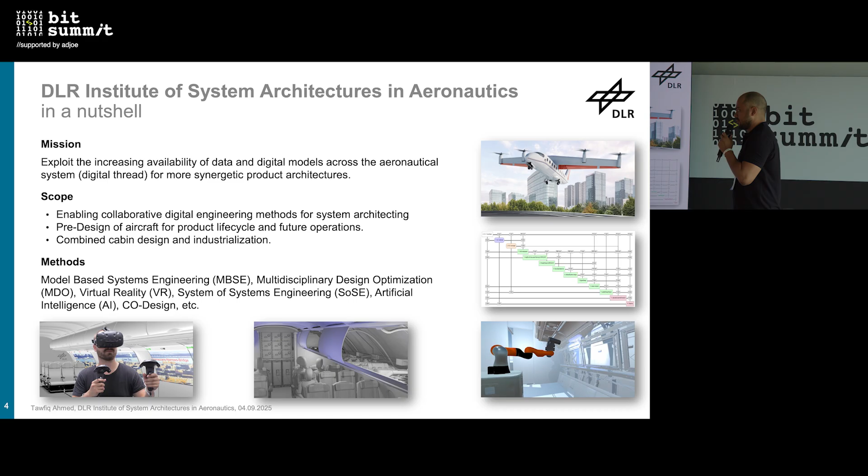And of course, with artificial intelligence, we try to implement it everywhere it makes sense, mostly machine learning. Sometimes it's surrogate models or probabilistic models for different parts of the data workflow. And also we do a lot of co-designs and robotics and so on.

So first of all, what are the different fields we are interested in our institute? First of all is aircraft concepts. So before we create or design an aircraft, we have to find out different versions of that aircraft and find out which one makes the most sense for the specific mission. So this is one of the most important topics we work on in our institute.

And the second one is zero climate impact. So whatever we are designing, it shouldn't have any climate impact, like in terms of carbon or emissions whatsoever, you know.

And the last one is system integration. For example, we are researching implementing hydrogen capsules inside the aircraft. It's like a future version of fuel, because at some point we'll run out of fossil fuel and have to find a replacement. One of the most promising technologies we have is hydrogen. So we work a lot on hydrogen tanks and hydrogen integration into aircraft, trying to understand how it works before going into prototyping. And also certification - okay, you're done, now what? Who gives you the permit? So this is what we do.

Secondly, we also perform digital manufacturing, not physical manufacturing, don't get me wrong. We design how it might look when going into manufacturing phases, and also integrate cabins - not only from outside, we also integrate the cabin inside the aircraft and see, does it make sense? Does it fit well with the design we are creating?

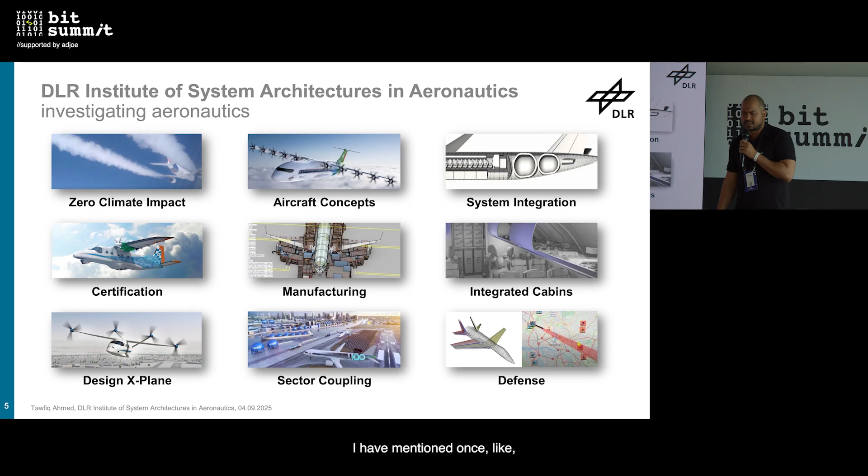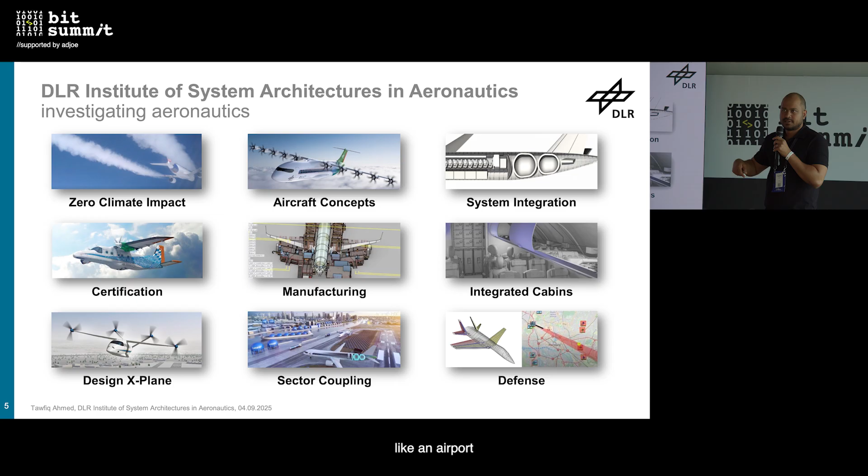Also sector coupling is another part. As I've mentioned, think about an airport where you have different systems and have to understand how to implement all those together. We have a specific group that works on system of systems. They simulate an airport, how it looks, running through the whole thing - airplanes coming down and going out. It looks easy, but when you think about thousands of flights a day in an airport, and you have to consider the energy, the maintenance, the fueling system, the passengers incoming and outgoing, it becomes quite complex.

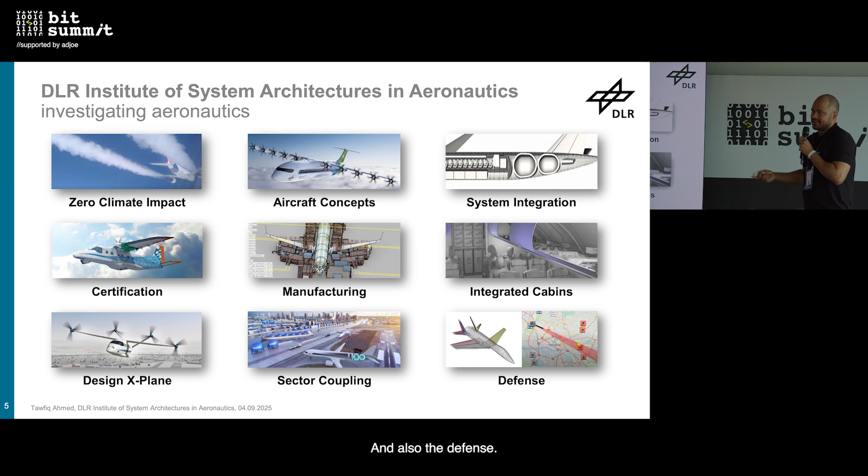And also defense - I can't talk a lot about the defense side, but you understand, right?

So my first question - do you have any idea how we design an aircraft, or how to design an aircraft? Anybody? Maybe the first phase. All right, I'll give you a task: you have to create or design an aircraft. What do you do first?

Very good, very good. Yes? I think that's very good. Yes? Like a base model and then continue. Yeah, actually all of those answers are correct. Even ChatGPT was correct.

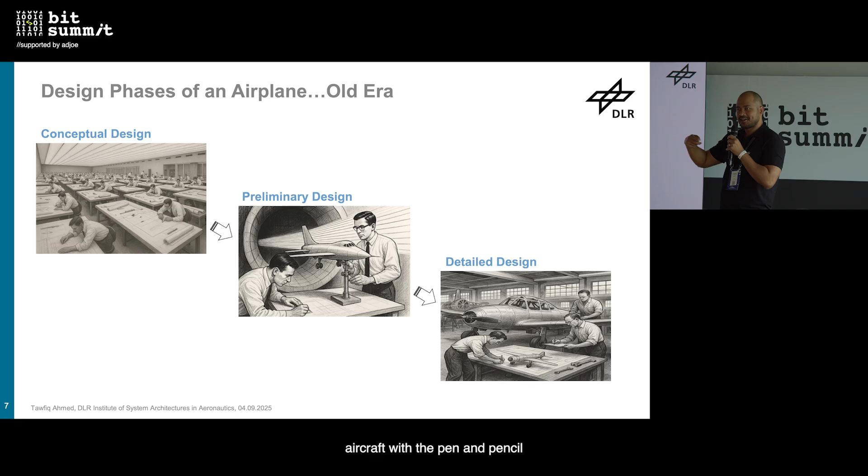But before we introduced the digital era, this is what it used to look like. First, we talk about the conceptual design. Can you imagine engineers designing the aircraft with pen and pencil on paper, hundreds of thousands of engineers together, before a digital CAD system was introduced? So this is the first part, conceptual design.

I'll go a little more detailed in the next slide. The second one, we design the preliminary version of the aircraft. The first thing you do is solve the basics of the aircraft - look at the requirements, then solve the physics of the airplane, then decide what it should look like. Then you create a small model and put it in a wind tunnel, and then you get the data.

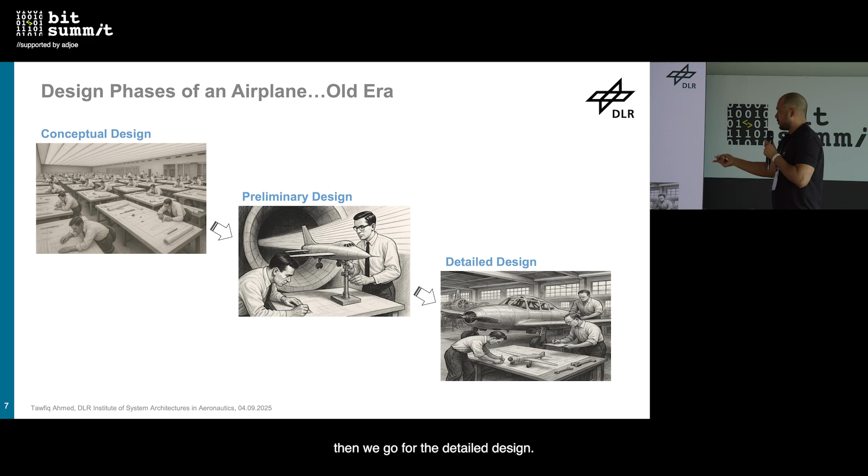If you're satisfied, then we go for the detailed design - we create the detailed design of the whole airplane, and then we create a prototype, and then we fly, and then we see how it looks. Kind of dangerous for a test pilot though. For engineers, we just say it didn't work - but for a test pilot...

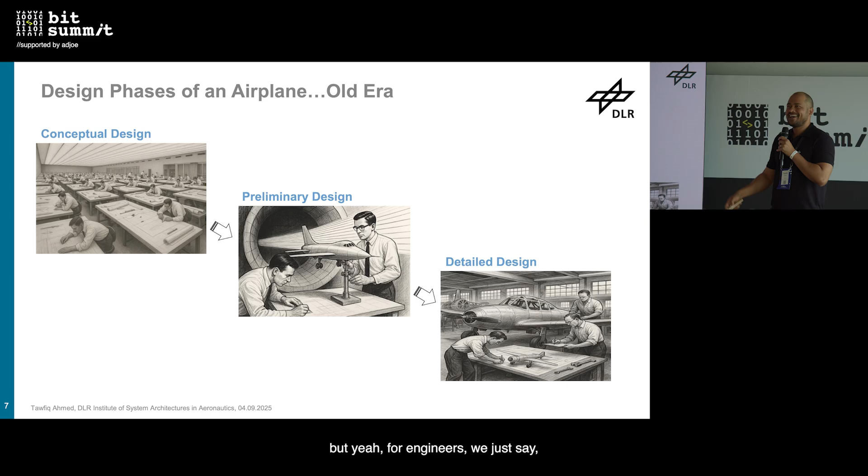So let's go a little bit more detailed. The first phase of conceptual design: first, you derive all the requirements, all the external drivers. Then you solve the flight physics - how it should fly, how far it should go, how long it should stay in the air, how many people will be in the aircraft. And also you do the new assessment of new technology.

This is a very important part, because designing an aircraft from start to end - the whole life cycle could take decades. Like the models you see - I think I've seen somebody from Airbus here, we just met, I think. All right.

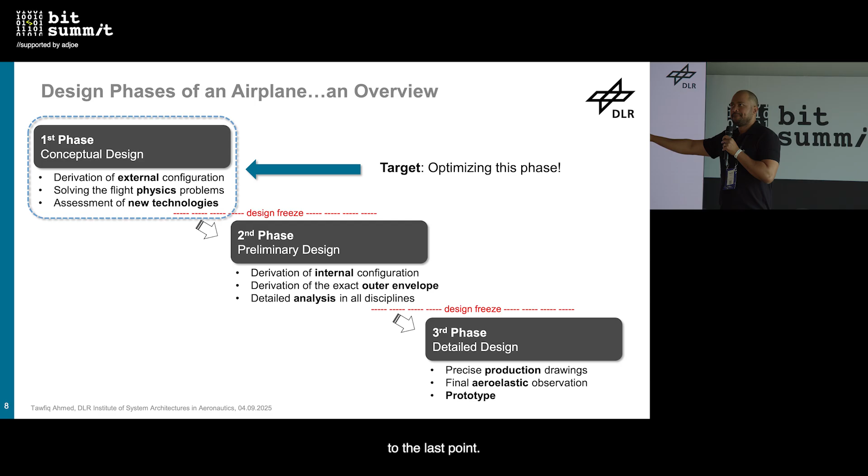It takes around a couple of decades from the starting point to the last point. So you have to also consider that within this 10, 20 years, the whole technology might change. That's another important part you have to think about, so we also assess that part in the conceptual design.

Second one is preliminary design. Now you decide, okay, I have all the calculations done, I've decided what it should look like. Now you design it, create a small model, put it in wind tunnel testing, and test it for different ranges, like different altitudes of the atmosphere. Then you get the data, you validate your calculation, so it works like a cycle.

When you're satisfied, you say, alright, let's do the detail phase. Now the test pilot comes and says, let me try it, and if we're all lucky, it will fly nicely. So this whole thing is kind of a loop, but when you're done with the loop, you come up with the design freeze. You just freeze that phase, you don't touch it anymore. Otherwise it would be a never-ending loop.

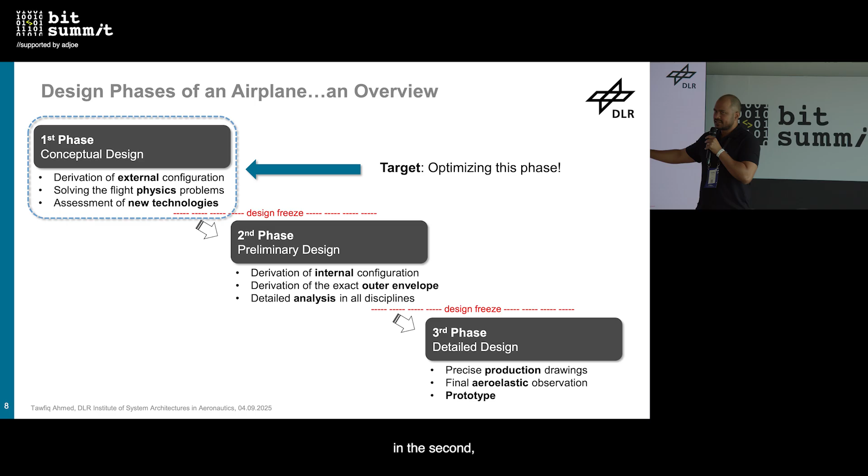So our main part is to optimize the conceptual design part so we can minimize as much error as we can before we go to the other phases. Think about finding errors here versus here. Why not optimize this part before this one? Actually, we optimize all these phases, but the preliminary design part is very expensive and time consuming, and the detail phase is life-threatening. So you have to focus a lot on conceptual design so you can come up with solutions to all possible problems.

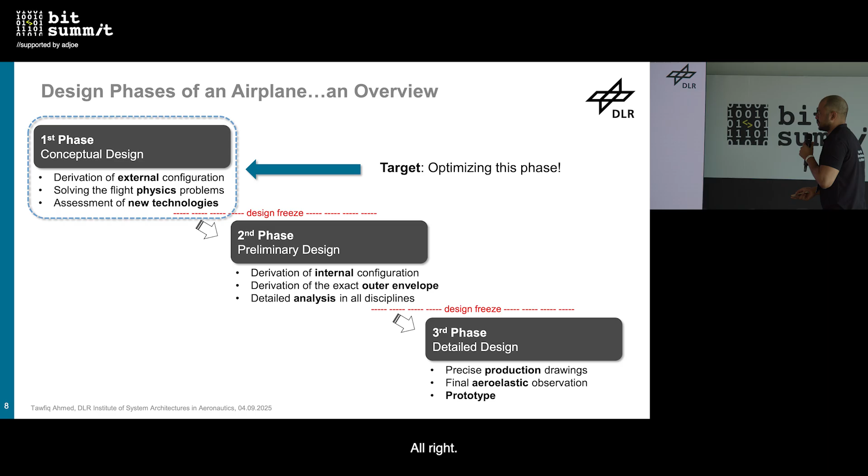Now the question is, as I've shown you pictures where all the engineers were drawing on papers, now is the new era. So what if airplanes could be designed digitally first, before we move on to those physical phases? So why digital? Any idea? Why should we go for digital design? Cheaper? Faster?

Reusable? Safer? Verifiable? Very good, I think they're all correct answers. It's faster - it used to take months, now we can do it within minutes or hours. Now we can run 100,000 or millions of simulations before we create a prototype, so it's very, very cheap right now, and we can find errors before we go to the next phase.

It's sustainable aviation - we have to find a way so this aircraft design is not producing a lot of carbon or whatsoever. We can experiment with a lot of things, optimize the design, change the design and see how it works, which isn't possible in the physical phases like preliminary design and detailed design. We can also connect all the systems - the cabin, the aircraft itself, the fueling system, the other control algorithms, or the engines.

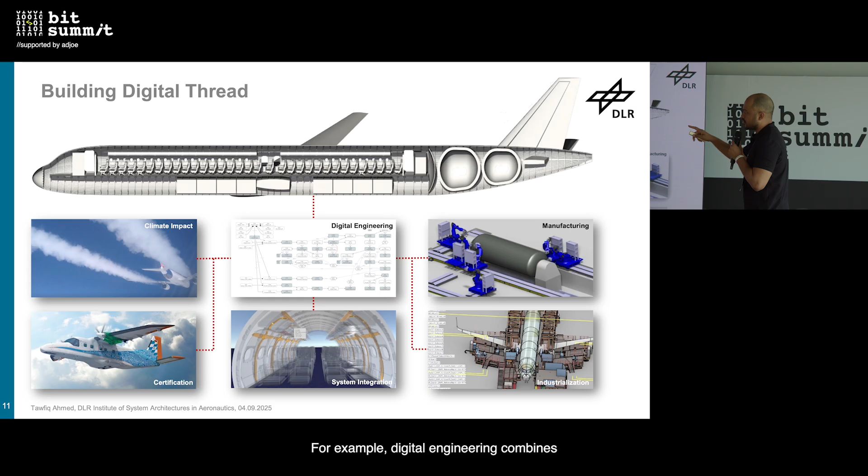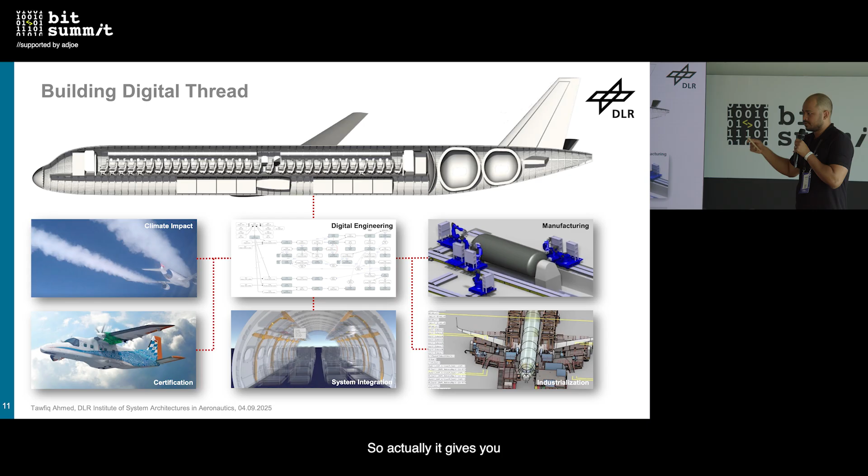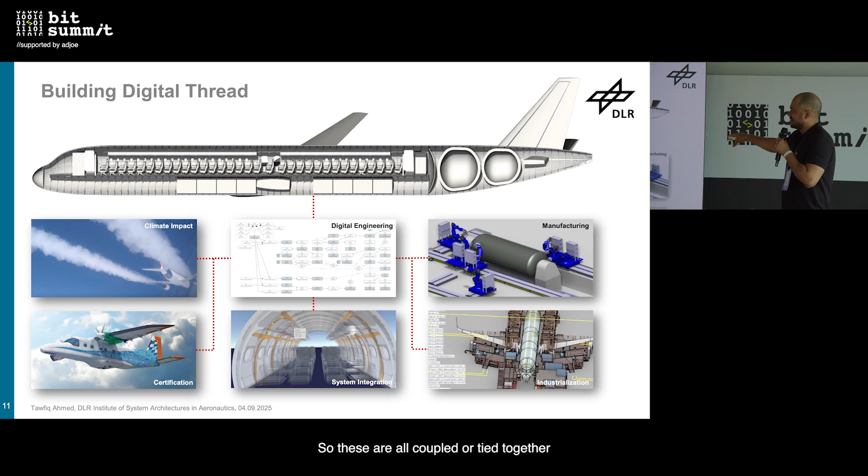First we do digital engineering. What it is, is it combines all the different phases. For example, digital engineering combines climate impact, the manufacturing phases, industrialization, system integration, certification, all together. As you can see in this slide, there are lots of different workflows, lots of different parts - those are different parts of the whole digital process, all coupled or tied together in a digital thread.

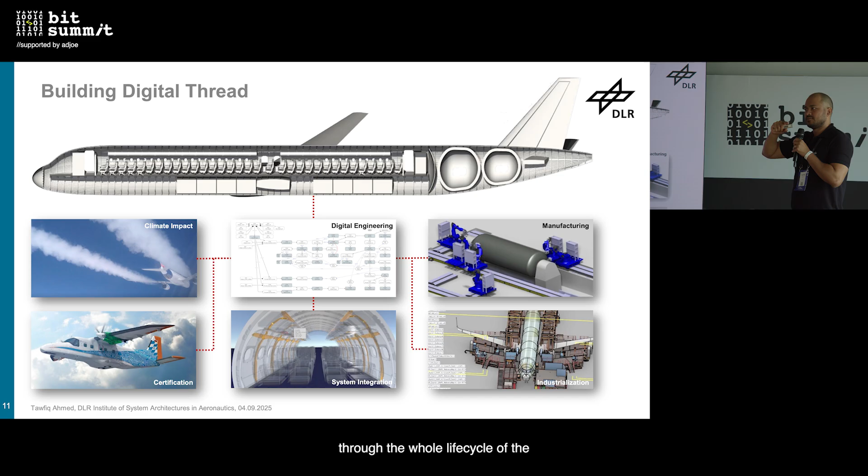So if you run it once, the idea is you get all the information about what might happen through the whole life cycle of the aircraft design. So in our digital engineering process, how do we approach this problem? First we define the problem - what is the problem? Let's say somebody comes, very rich, and says, I want you to create an aircraft that can fly, I don't know, 20,000 miles. That's the problem definition.

So you come with the stakeholders and the needs, the requirements. What do you need? Who are the customers there? And then secondly, you decide the system specification. So the first one was the mission requirement, this one is the system requirement. Basically, how my aircraft should look like.

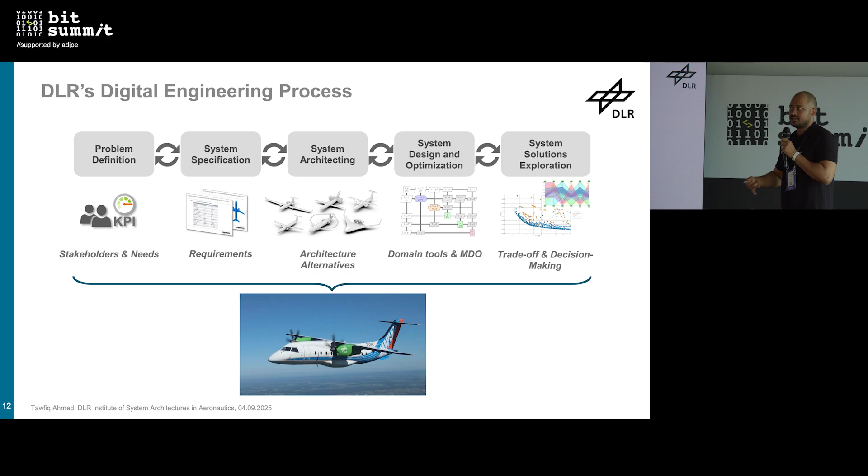Second phase of the problem. Third one, system architecting. So you have the requirement from the stakeholder, then from the aircraft. Now we have to design a couple of aircrafts and see what is the best one. The fourth one is system design and optimization. Now you have the designs, and you optimize the whole system to make the most possible design spaces for that problem.

And then the last one is system solution exploration. So what you do, you trade off different models, you choose one, and this whole process comes up with an aircraft. As you can see, all of these phases are interlooped within each other, giving feedback after each loop. It's a very optimized way of designing the whole process, because in each phase you can find the error and reduce it before you move to the next phase.

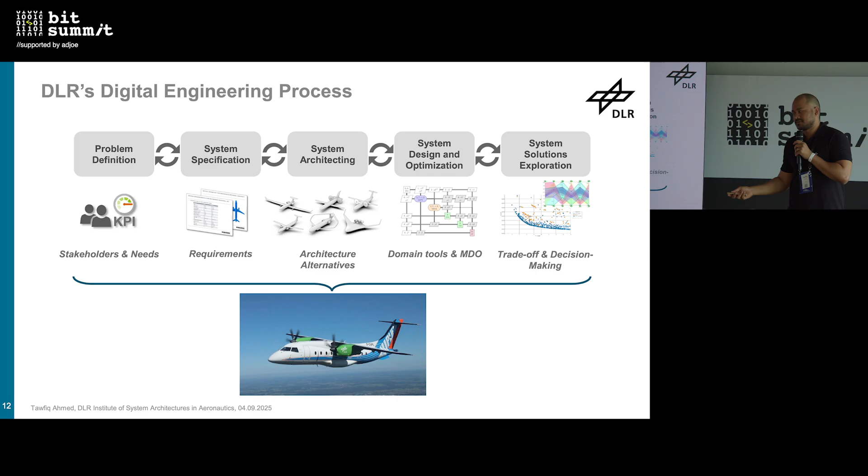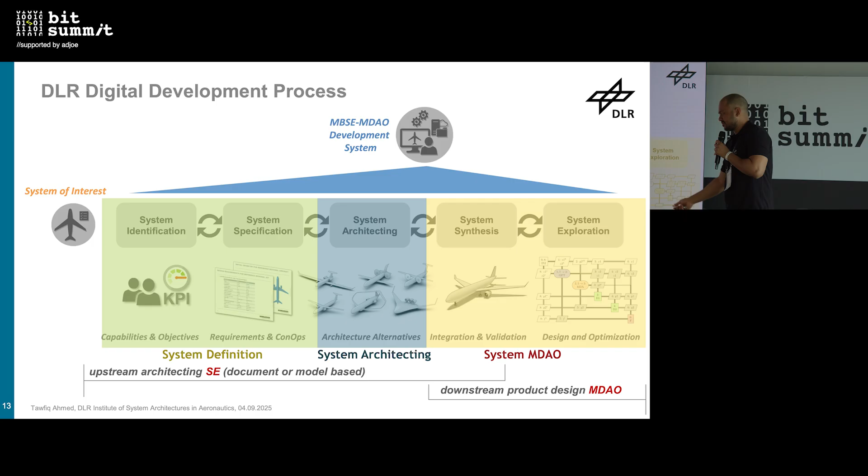So in general, we call these the three different phases of the design problem. This is the upstream architecting, and this part is the downstream product design. This whole process is called MBSE, MDAO development system - model-based system engineering and multidisciplinary design analysis and optimization.

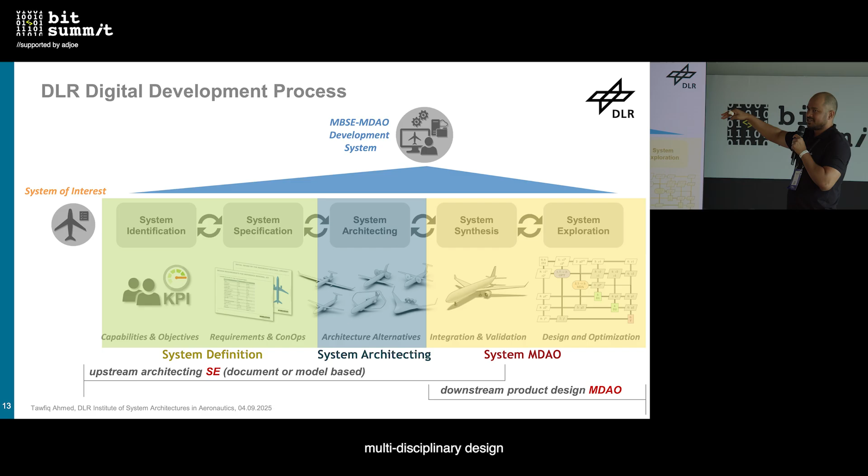To face this kind of problem, this whole process, in DLR we have this collaborative MBSE MDO framework where we have developed multiple tools to tackle all the data passing through those different phases. I'll be talking about the tools that are open sourced, publicly available. I cannot really talk about all the other tools that are in-house. So this is an overview of what we do for different phases when you design an aircraft. That was a whole overview of the aircraft design. Let's get to the point now.

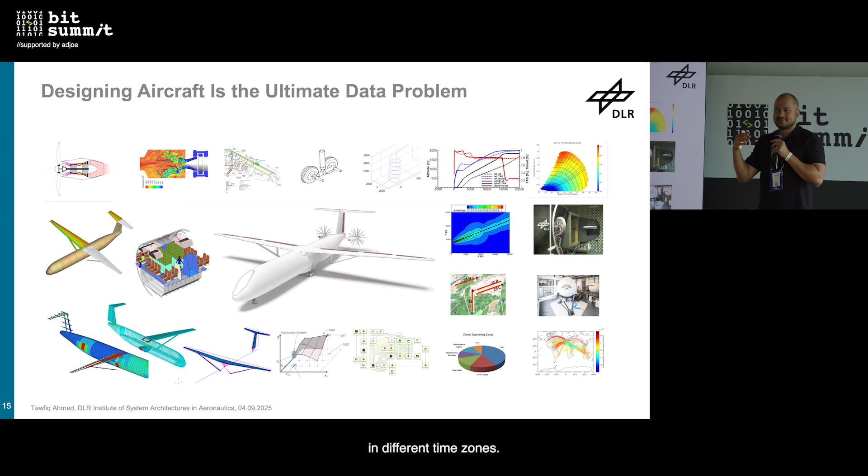I don't know if you have issues like meetings in different time zones. Somebody is from the US, somebody is from the UK, somebody is from Japan - how do you handle that? And that's only for meetings. Think about this kind of data.

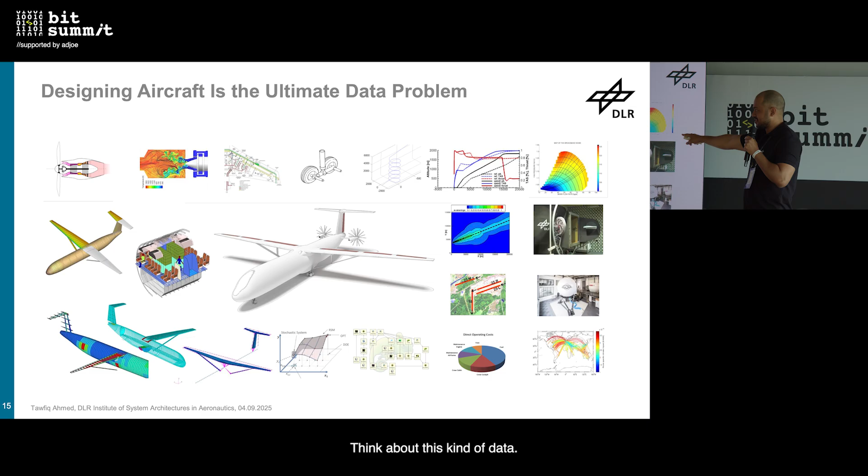So that was a huge issue at the very beginning when we started working together on a collaborative design problem in our institute. We had to find a way to create a data model that would be both machine readable, also human readable, and passable - you can pass that data model to somebody else. Don't think about it as a database or something, it's like a data model, like a language, finding a common language.

For an example, if you compare with real life, somebody speaks French, somebody speaks some other Latin language, somebody speaks Chinese, somebody speaks Japanese - then they would have a real problem when they communicate with each other.

So we had to find a common ground within all these different disciplines. What if we had the same language for every discipline? Then we can reduce the total number of different formats or issues by a significant number. We call it Common Parametric Aircraft Configuration Schema, in short, CPACS.

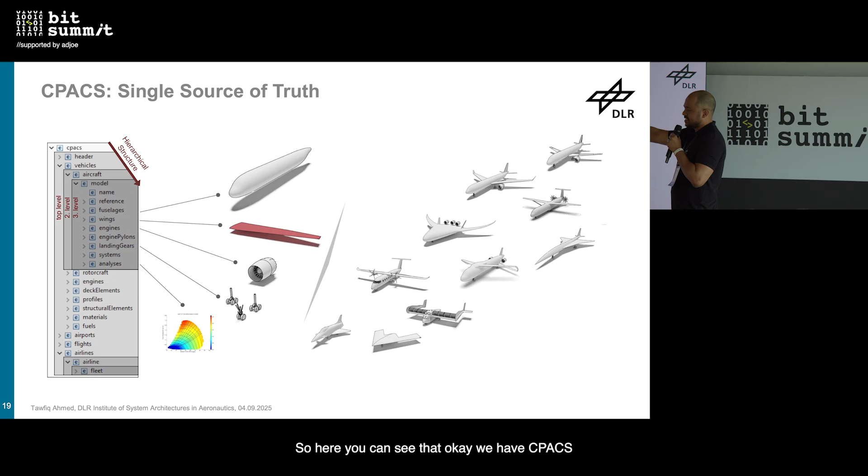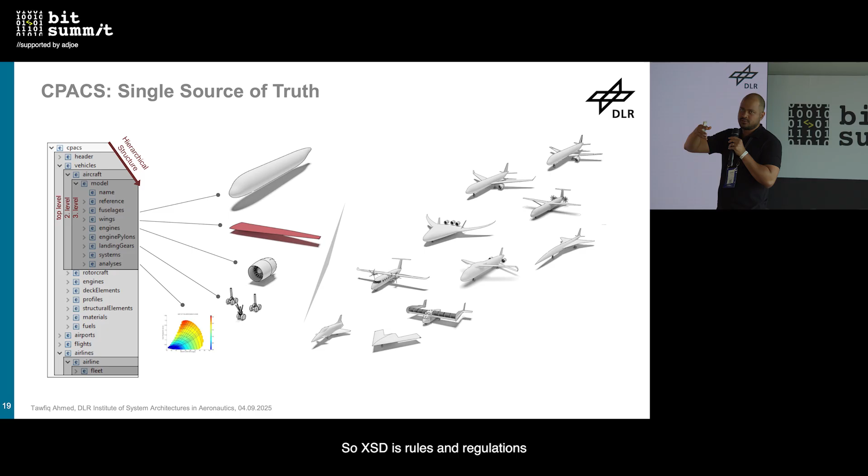So here you can see that CPACS has two different data formats. One is XSD, the other is XML. XSD gives you the schema — schema means the rules and regulations on how you write the data. And the XML is the format where you write the data. So XSD is the rules and regulations, and XML is how you write the data.

So as you can see, this is the format of an XML file. Here you can define the fuselage of an aircraft. You can define the wings of an aircraft, the engines, the landing gears, and then the analysis results if you had some. So this could all be coming from very different institutes or organizations. But they could put their data inside this file, and everybody would understand. That was the whole purpose of CPACS.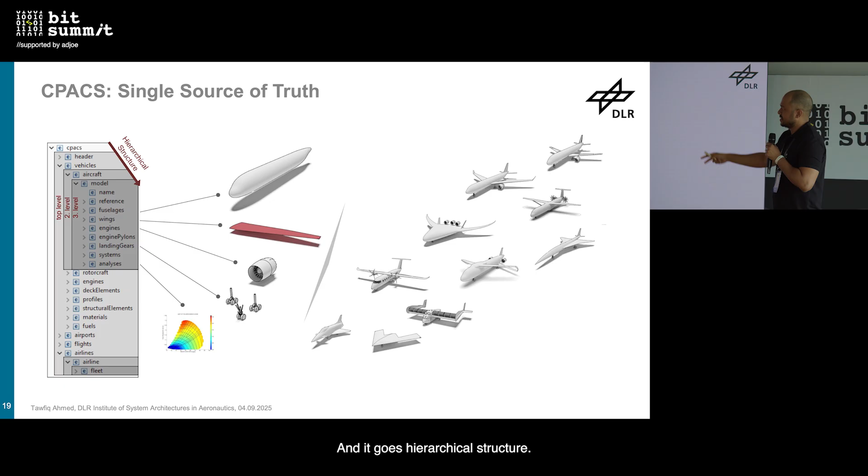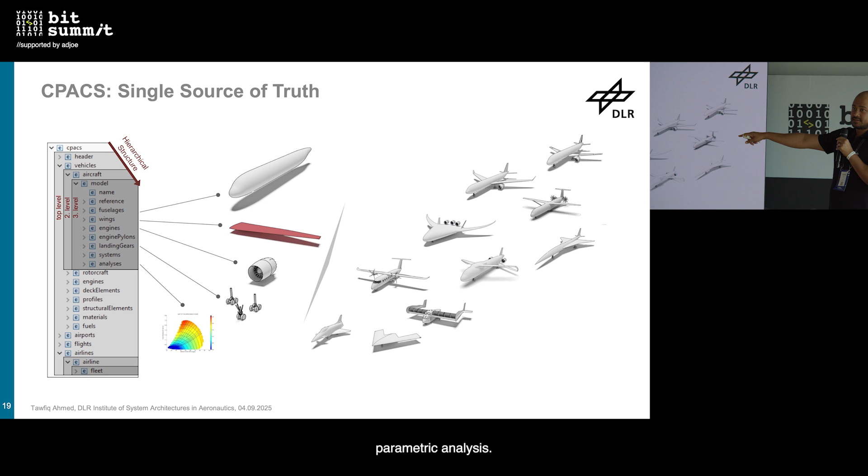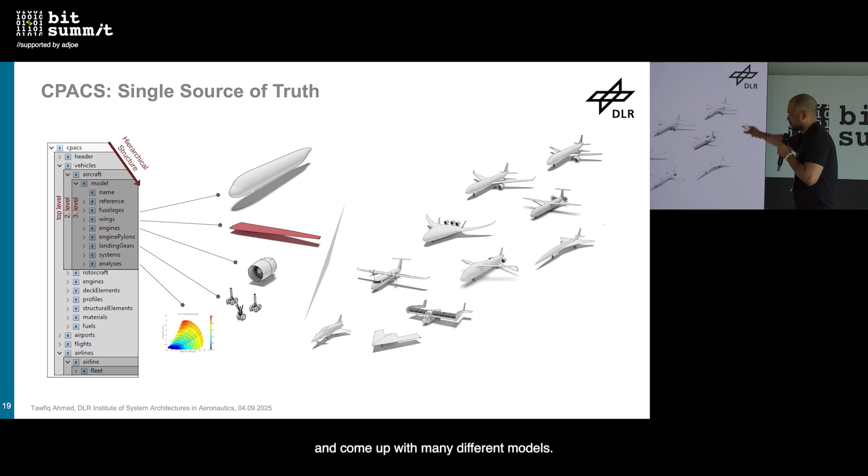And it goes in a hierarchical structure — a top level, second level, third level, it could also go deeper, but I didn't put it there. Also, with this thing, you can do parametric analysis. So you have a couple of fuselages there, a couple of wings there, a couple of different engines there. So you can just put them all together and come up with many different models, and then it actually helps you explore the right model you need for the mission.

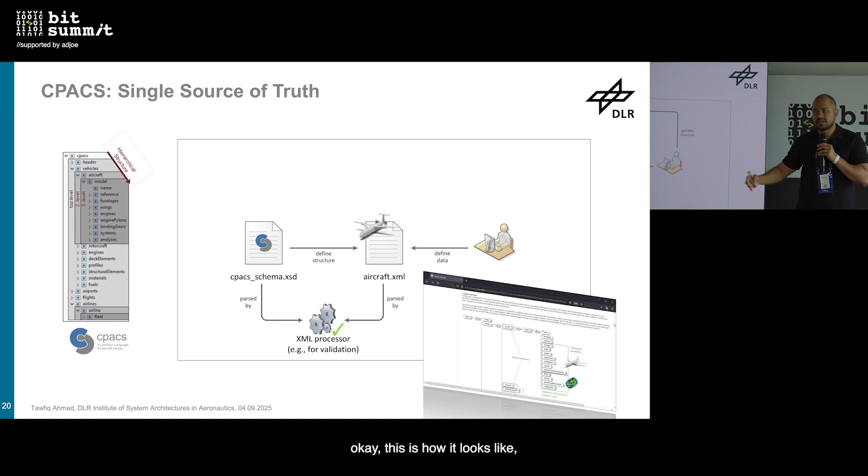So how does it work? As I'm saying, there's one schema file, XSD, and we have this XML file. So we have this XML processor that actually validates whether your XML file is okay or not. And then you come up with the documentation where it shows how it looks like, or how your data is. So this is how it looks like in the CPACS format.

Alright, so the next tool is kind of cool. Now, all these things happen in the file, right? So how do I know what it looks like after putting all the data in the file? So we had to come up with a tool that actually gives you a 3D version of the airplane from the data model. This is called TiGL, and it is also open source. If you are interested, you can also check it out and be part of the community, also help developing it.

So DLR is a strong supporter of open source tools. It tries to involve all the academia and the industry together to come up with some brilliant ideas. So a very short example of how it looks like.

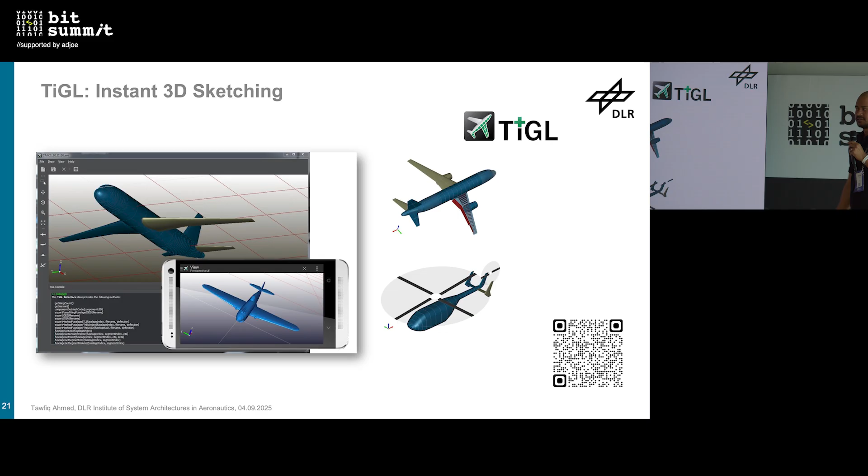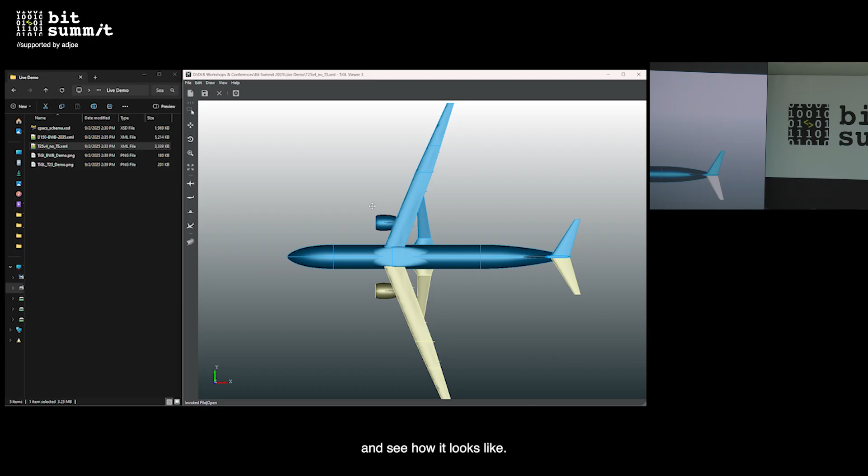So you just drag and drop your CPACS file and you could see the whole aircraft. Anything you change — there are different files you can come up with, so maybe you have worked on some different files. You just drag and drop and see how it looks like. Change the wings, change the engine, and see how it looks like. This was actually a very important part, because by looking at the data, you have no idea basically how it might look like. So we had to come up with a way that will give you the impression of how your data is looking right now.

So next, now we have the data, and now we've convinced everybody to use that data model, now we can see the data. So the important problem is how we work all together. That was another issue. We have one partner in Bremen, another in Stuttgart maybe, another in the UK, another in the US.

So let's say partner A is providing the engine, partner B is providing the whole structure, partner C is the software, partner D is the cabin. We had to find a way so that all those tools could be integrated in the same system and work simultaneously all together. So that is when we came up with this software called Remote Component Environment, RCE in short.

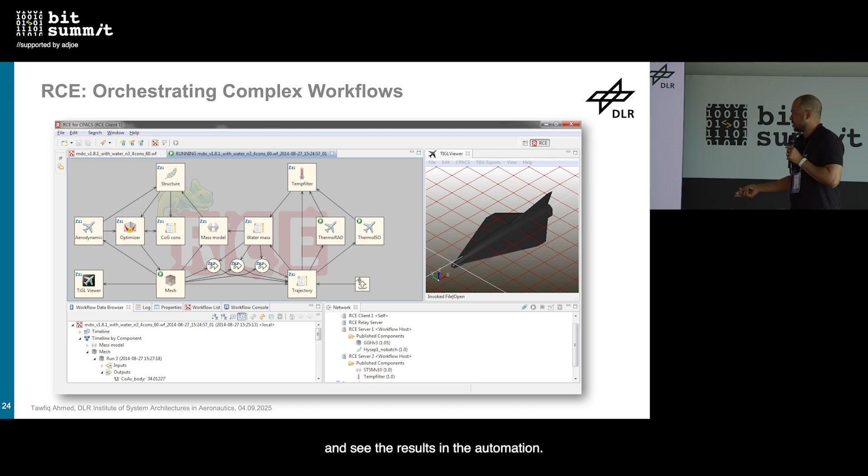It is also open source, by the way. You can use it not only for aircraft design, but for any kind of workflow automation. It doesn't matter, it could be in medicine, it could be in some other fields as well. So RCE is very flexible, you can modify it for your own use. Just use any kind of language or tool, implement it, and see the results in the automation. It's open source, free, so kind of cool.

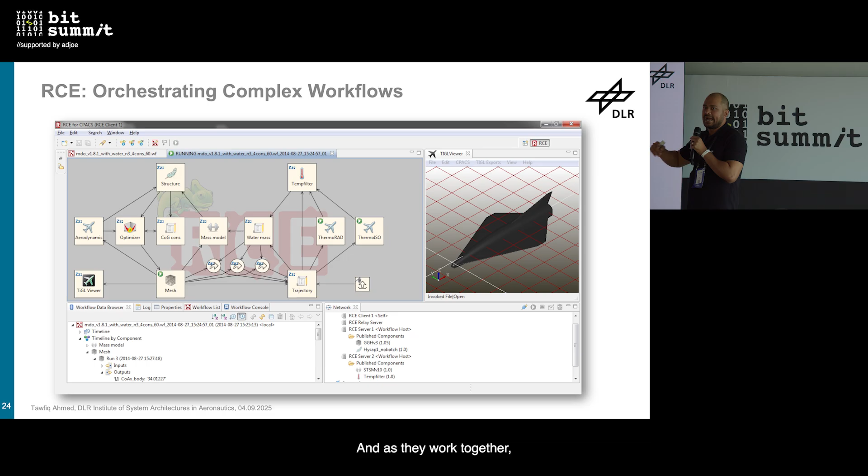And this is how it looks like. It's not really super cool, like a commercial look, but as you can see here, you have TiGL viewer, and here all the analyses are working together. For example, thermodynamics analysis, there's some trajectory working, there's optimization, aerodynamics, whatsoever. So they all work together, and as they work together, you can see the simultaneous change in the geometry. When it's running, it's really cool, actually.

So this is an overview of how the whole RCE looks like. I wanted to show a video, but it took a lot of different architecture work to do that. But it's open source, you can download it and use it by yourself.

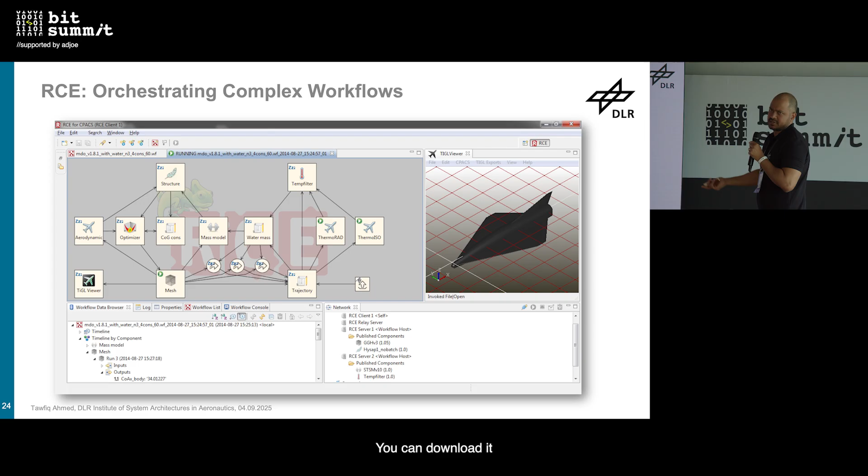So what are the things you could do with RCE? First of all is integration - you can integrate your tools, any kind of tool, in RCE pretty easily. Second one is data management - if you're into the data, what is going on, which data is going to which tool, how it's going, what is my output, you can go deep and check all the data from all the phases.

And also you can automate your tools. Like from this tool would go to this tool, this data would go from here to here, and you can then automatize the whole system so it would run automatically. And the fourth one is collaboration. This is one of the biggest ones, because you had to find a way so that everybody could work together on the same ground. Otherwise, it was extremely difficult to work together.

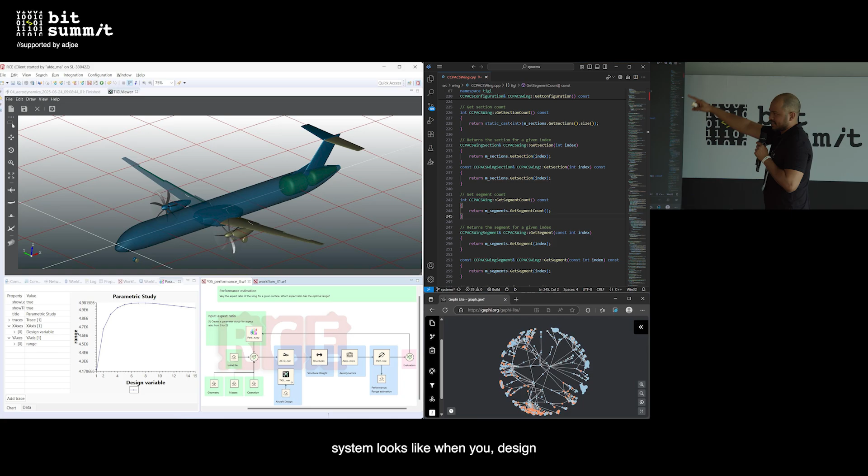So this is actually what the whole system looks like when you design something in an operational way. You have the CPACS data file, and here you have the whole process of the design file of the aircraft. You have the workflow, you can see the parametric studies, and you can see the whole view of the aircraft. So this is how it looks like when we work on some new conceptual design for any new aircraft.

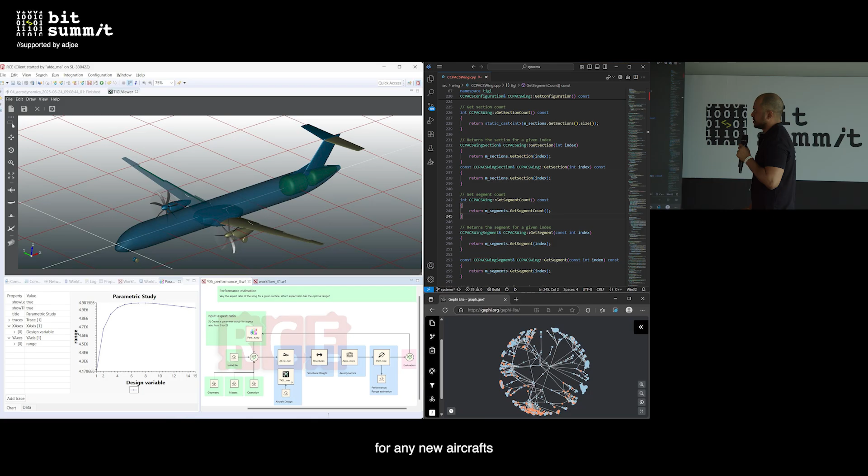Another cool thing is that we created this digital hangar. So we have worked on many different aircraft models, and we decided to put them out for the public. We just opened it up a couple of months ago. It's also open source, by the way - you can go to the website and check it out. You can choose any model there and download the file, the CPACS XML file, then modify it, change it, play around with it, use RCE, and use TiGL to see how it looks like. So you have all ready-made aircraft models here.

So, as I said, beyond aviation, this whole process - creating a data model, putting them in the same environment for workflow, then getting the data, analyzing it, and passing it through the other organization - this whole process has been used beyond aviation. We use it in space, we use it in wind turbines, energy sectors. You can use it for train design, or vehicle, or solar panel design, or maybe marine design architectures, also drones. So these are all the fields DLR has been working on, basically.